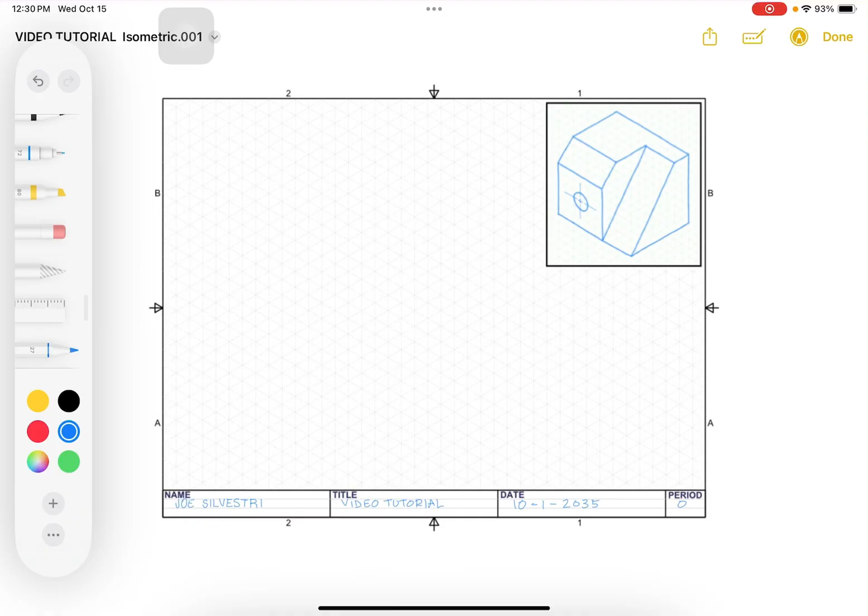And then the next thing you want to do is observe the object. So I'm going to zoom into that. And so this object is fairly complex. It has two angled surfaces. And you can see that here's one of the surfaces, here's the other. And then it also has a hole in it right here where my cursor's at. And so it doesn't tell us how deep the hole is, therefore we assume it goes all the way through.

And so to get started, we're gonna practice what's called subtractive modeling. So we're gonna draw the overall rectangular cube first, and then we'll carve the pieces and parts out of it. Now keep in mind, just like I taught in the lesson, that we draw all isometric lines first, and then we draw non-isometric lines last by connecting the ends of existing lines.

So what is an isometric line? Well, that's a line that is vertical, so watch my cursor, right? A vertical line, or a line at a 30-degree angle going off to the right, or a 30-degree angle going off to the left. All other lines are non-isometric. They don't tell us what angle they're at, because again, we draw them last by connecting the ends of existing lines, therefore the angle doesn't really matter.

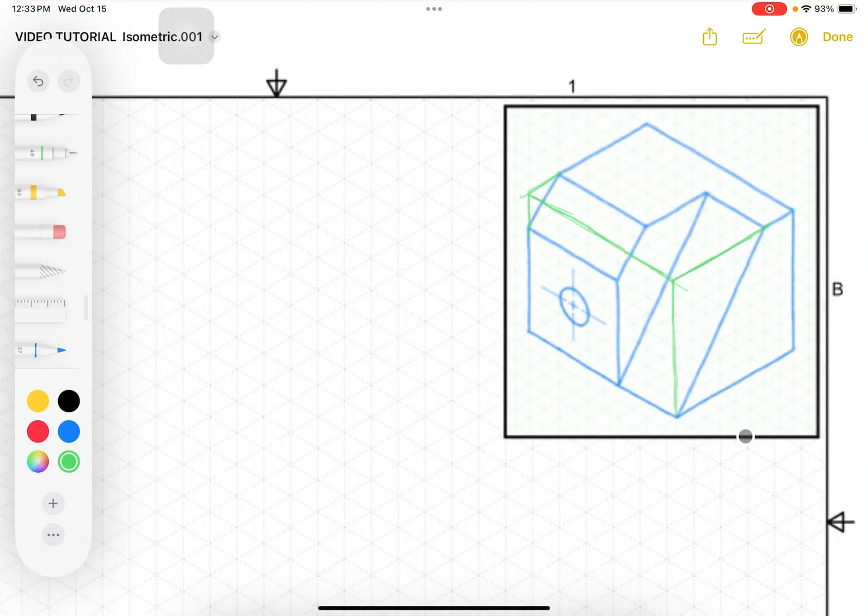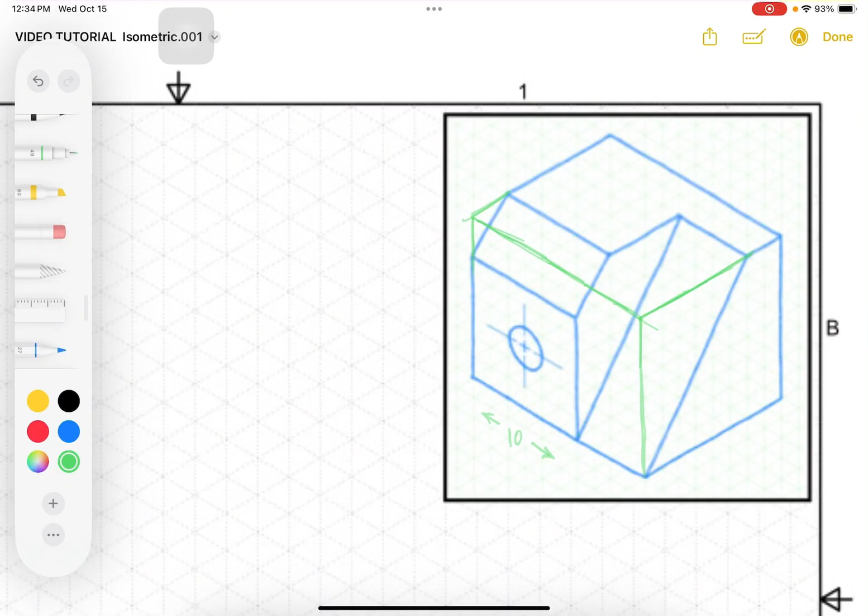So let's go ahead and write down the overall width, depth, and height. We'll write it right on our drawing. And let's see, I'm going to have to zoom in a little bit. Let me count here across the back. So it is 10 blocks wide, and that's in this direction. And I would write this down, and how you write it down, label it, as long as it makes sense to you, that's fine. You'll see in other videos of mine that I do it differently. Again, whatever makes sense to you. They're just there to help you out.

Okay, so that's the overall width, and the overall depth is 8 blocks, and that's in this direction. And then the overall height is 8 blocks as well.

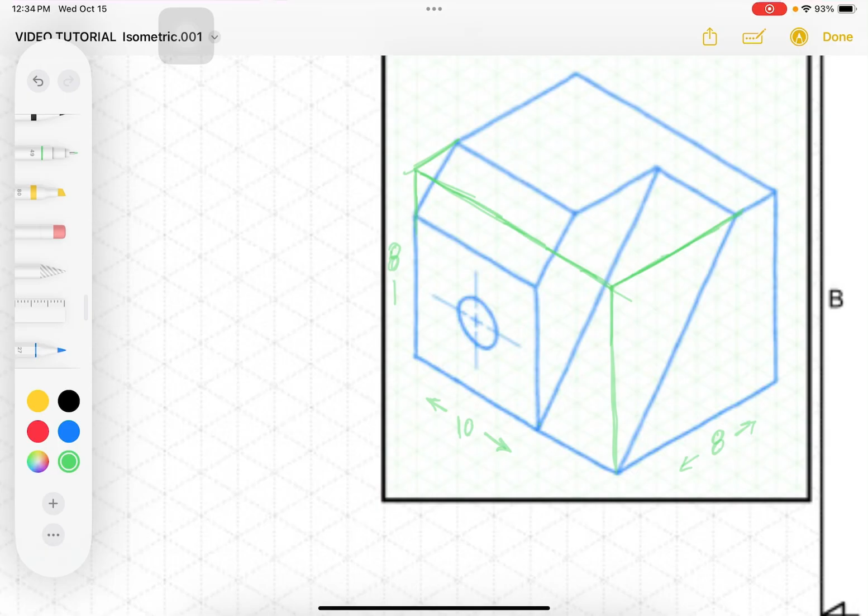Okay, so now I can come out here to my paper, and because I have the isometric in the upper right-hand corner, rather than start in the middle of the paper, I want to cheat down a little bit and a little bit to the left. So somewhere over in this area, I want to plot that point. So I'm just going to go ahead and mark that point. Let's say it's right here, where I put that dot. So I can go 10 in this direction, 8 in this direction, go up 8, and then make my shape.

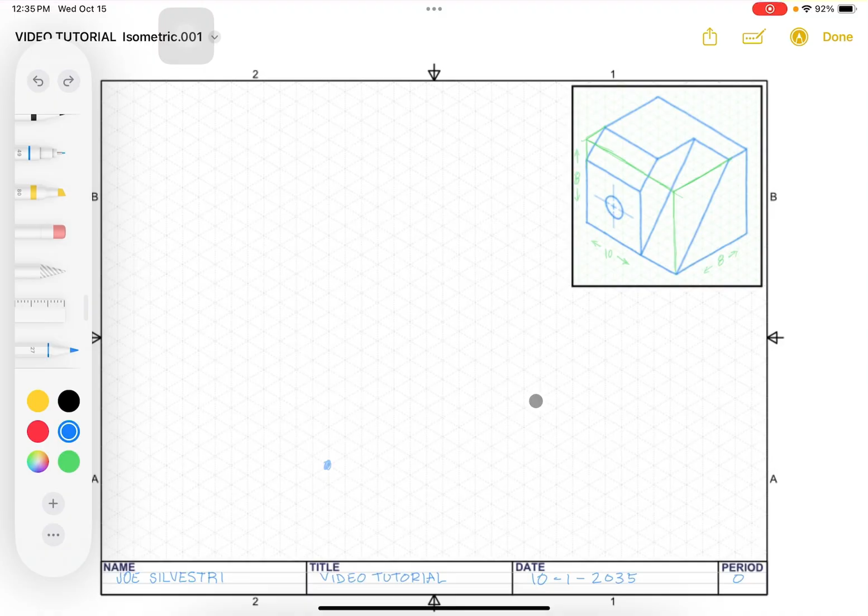So to start with, I'm just going to draw some lines, extra long. Now I want to do this as construction lines, so real nice and light, so that when we get all done, we don't have to erase anything. But yet these lines were here to help us rough in the shape. Okay, so like this. So now I can count along the lines.

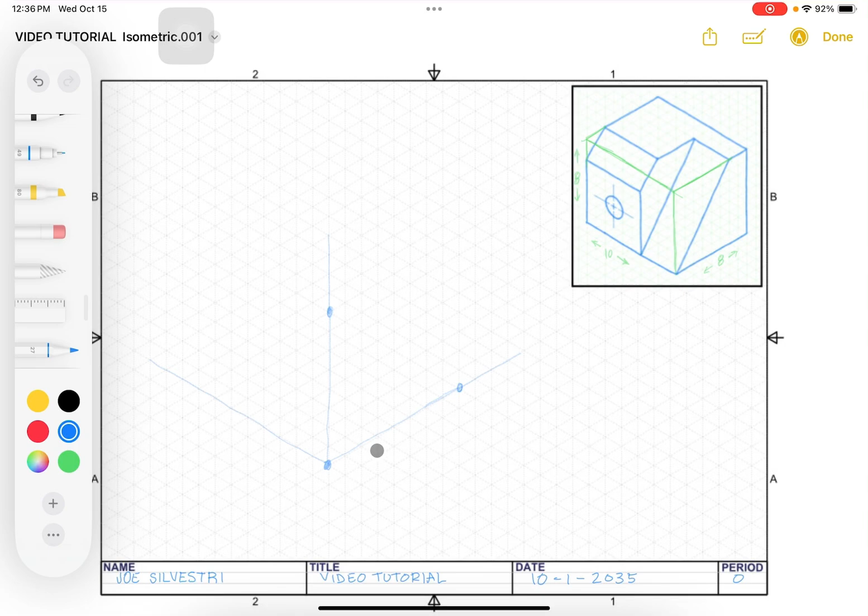And I can plot dots. That's where the line should have ended, right here. And here for the height, right? So right here for the height, and then across the front, that has to be 10. So right here where I put my dots. So now I can just project these up, and I can follow the isometric grid, and I can make my shape. So this might just take a minute.

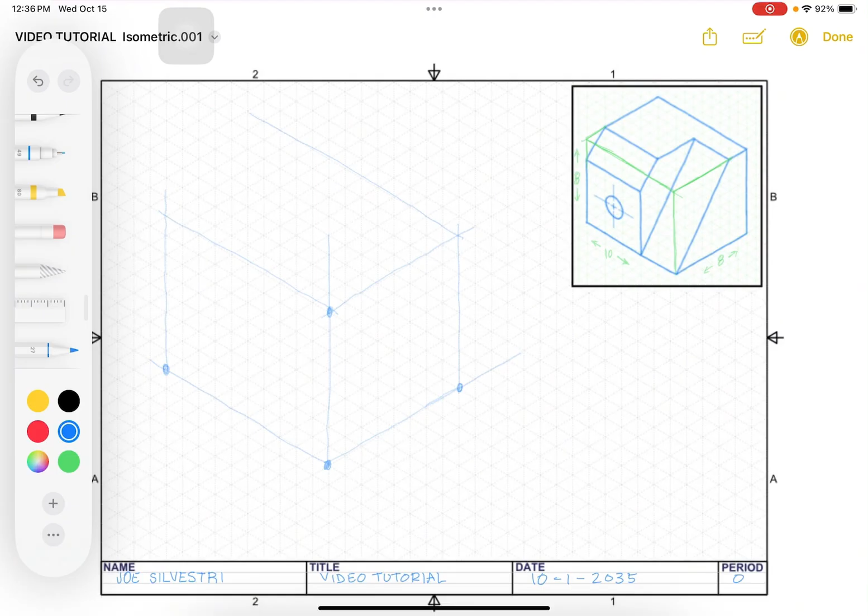Okay, so there we have it. So now I would start in the front view, because the front view is typically the most detailed view. And let's draw the surfaces from the isometric that are touching or are a part of the original rectangular cube. Okay, and so that would be, and let me do this maybe in a different color, just so we can see in the front view, the only existing surface that I haven't carved out and removed is this one here in yellow.

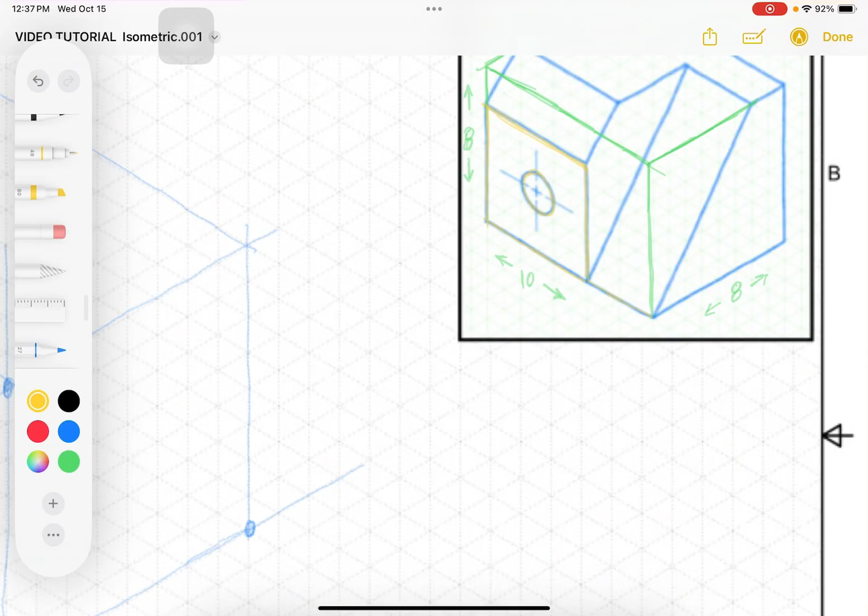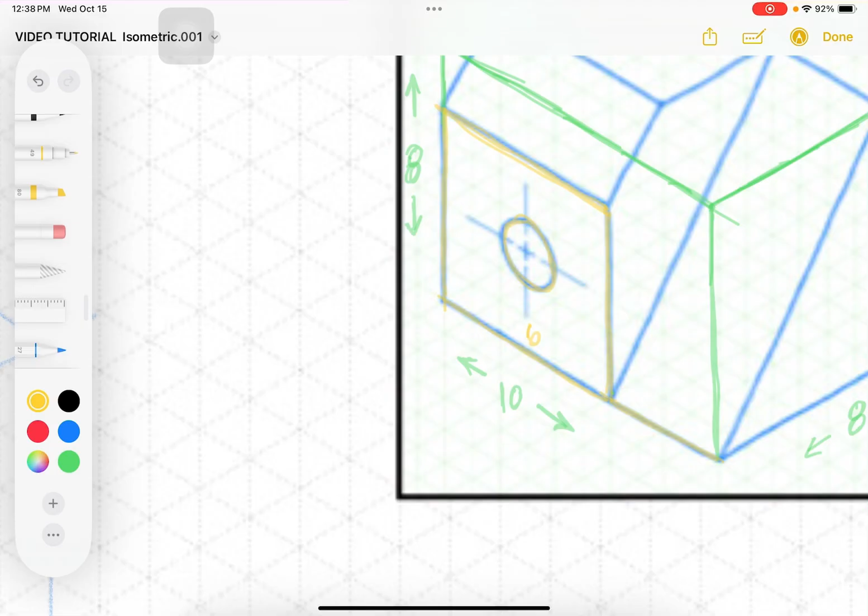So this rectangle, and this ellipse, which is called an isometric circle, and then just this line here. So I need to draw those in the front view. So if you want, you can come back here and you can count the pieces and parts, count the lengths of the lines. So this one here is 6. And it's 6 tall as well. So 6 by 6. So if I come back over here, I count that out.

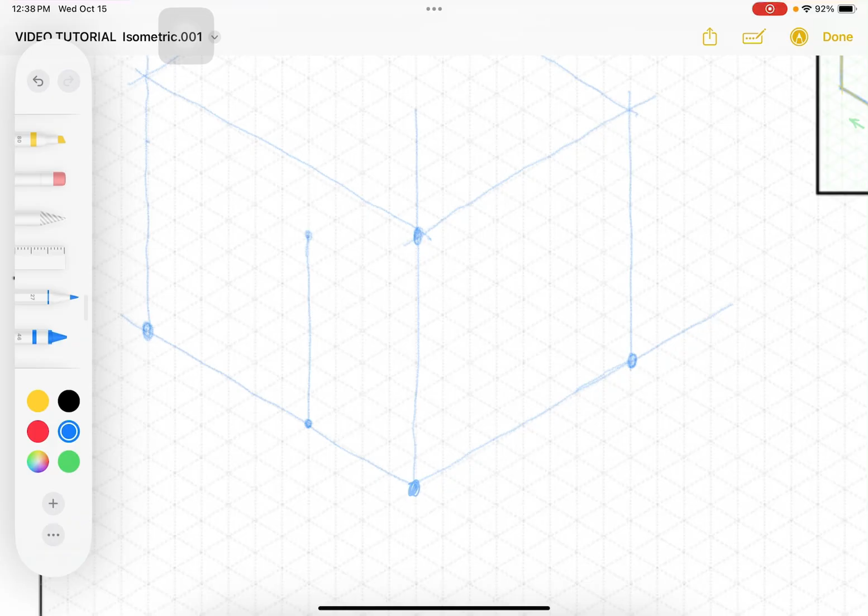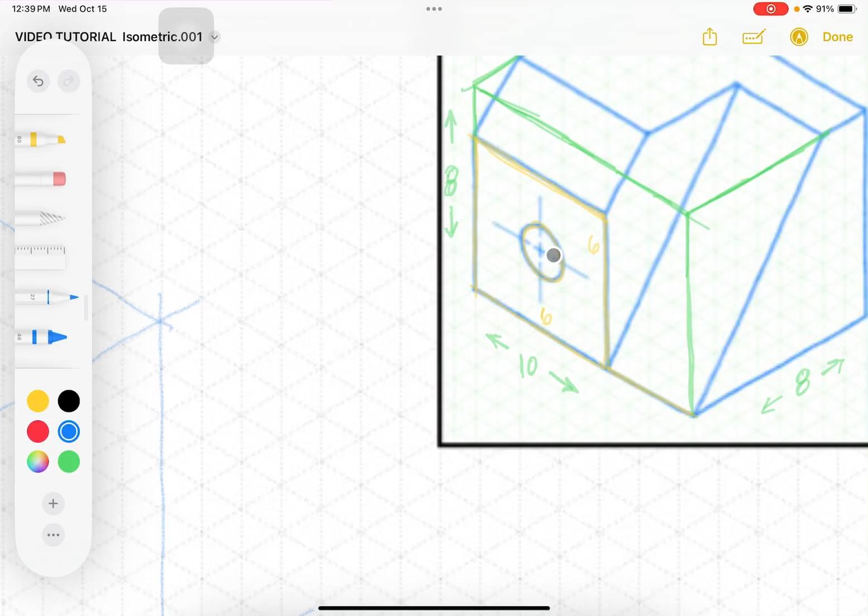And then I can just lightly pencil this in. And so this surface here is this surface here. So again, this is the surface that was a part of the original block. Okay, next thing I want to do is I need to draw my ellipse. So this ellipse is on the front of the object, so therefore it is slanted to the left. If you look at this ellipse, it is slanted to the left, and that has to do with my 30-degree line right here.

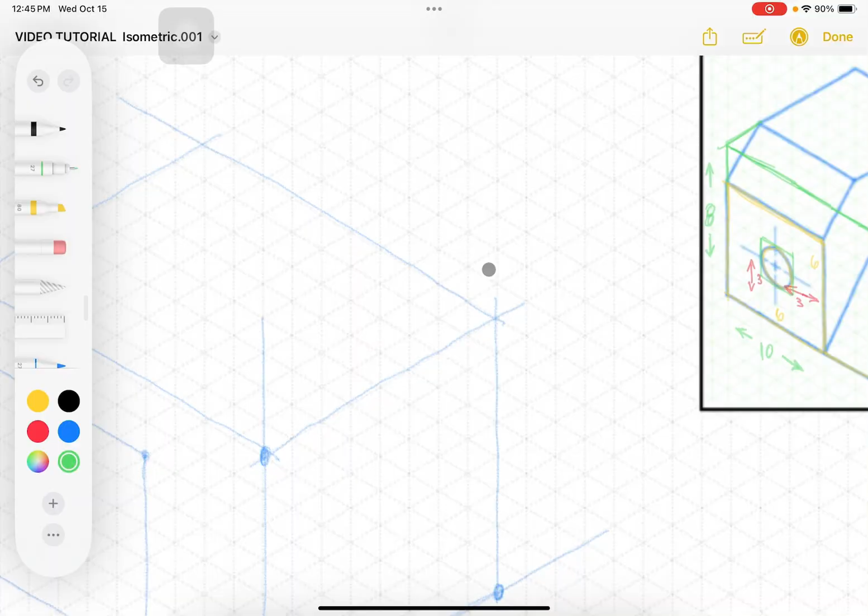Okay, so what I want to do is find out where the center of that ellipse is, because now that I've located the center of the ellipse, I need to locate that over in my own drawing. Okay, and so like we've already predetermined, that is 3 over from the right and 3 up from the bottom. I'm going to then draw this slanted rectangle following the vertical and 30-degree grid lines, and then we'll do a few more things to it that I'll demonstrate over here. So I'm going to come over 3. Okay, so that's going to be right in this area, and then come up 3 right there.

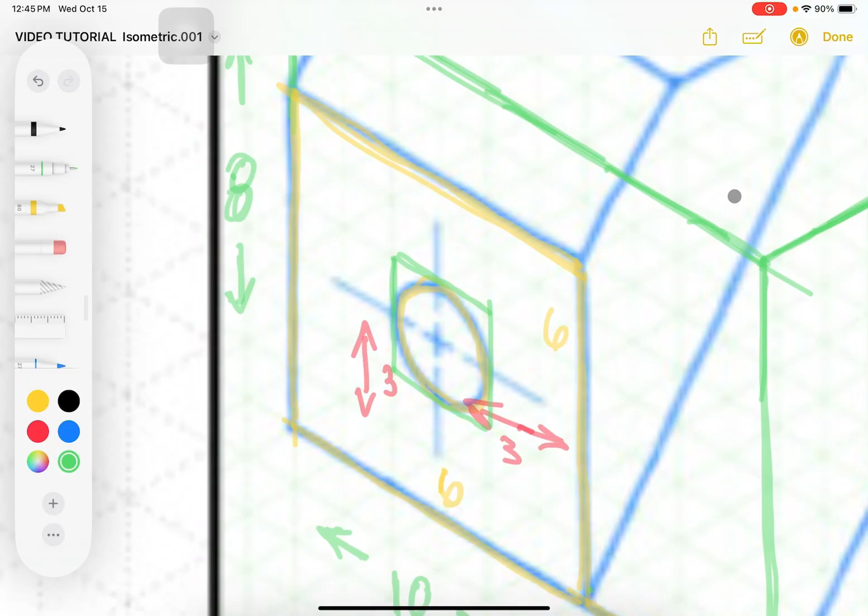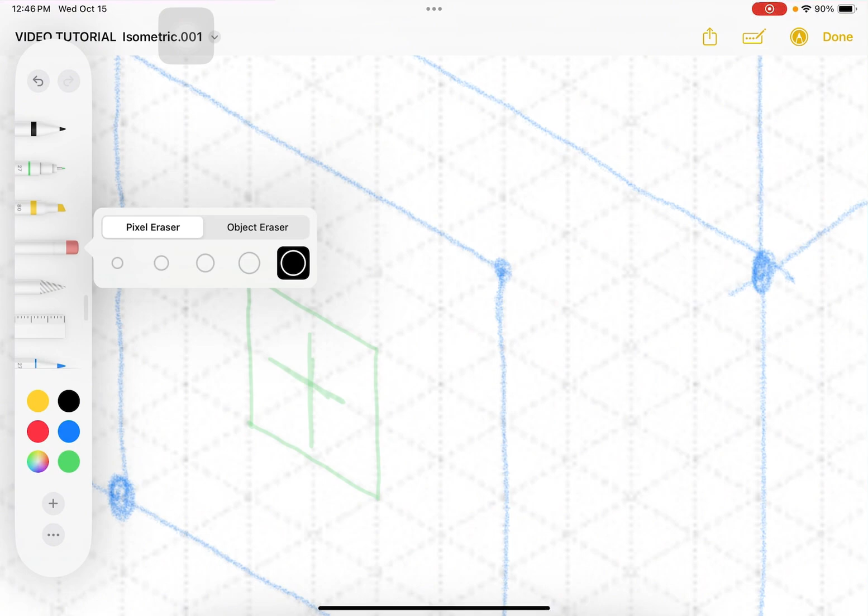Okay, and then I want to draw that slanted rectangle. Well, it is 2 blocks tall and 2 blocks wide. Okay, so from this, I'm going to draw this in right here, like this. Okay, all right. Now, just for visual purposes, I'm going to erase a few things as I go along, so I don't have too many lines on here to confuse you. All right, there's our slanted rectangle. What I want to do next is take each one of the sides and just divide it in half with a little line, like that. Just use your eye, estimate the center.

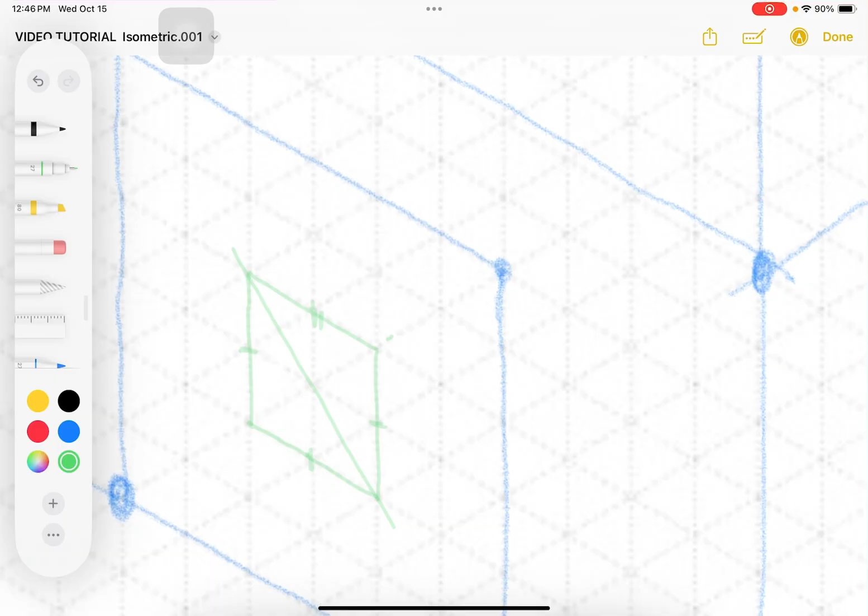Okay, then I want to take and connect the opposite corners. And then from the center, I'm going to go out the distance from the center to the corner. I'm going to come out about 2/3 the length of that line. Just use your eye, so about right here. And then I'm going to take this distance and divide it into thirds and come out about 2/3, so about right here. And do the same here, so it's going to be about right here. And the same in this direction, so about right here.

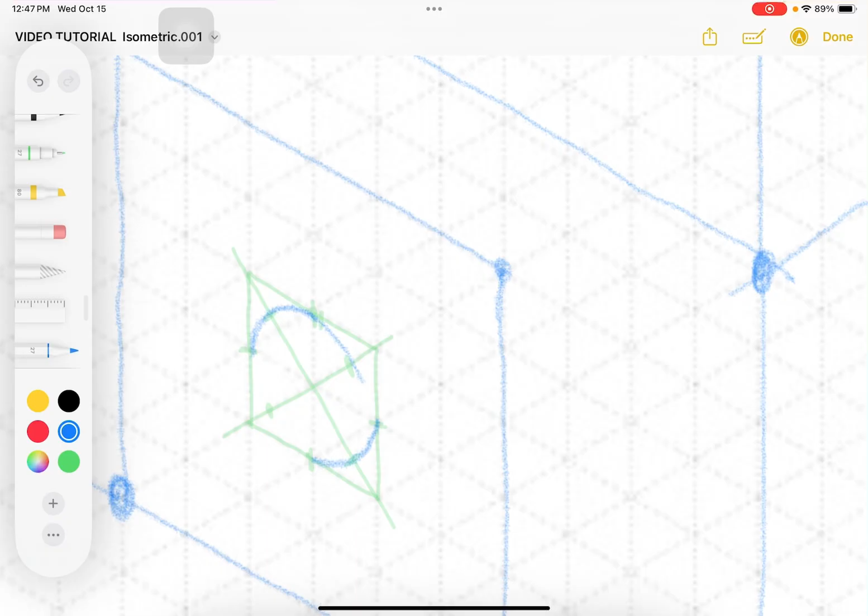Okay, so now what I want to do is make 4 arcs. I'm going to switch back to my blue pencil here. And my first arc is going to be connecting these 3 dots. My second arc, I'm going to do the opposite side here. My third arc, I'm going to connect these 3 dots. And my fourth arc will be connecting these. Okay. And so when you get done, it's not going to be perfect, but it should look pretty good. Okay, and so that is my isometric circle, also known as an ellipse.

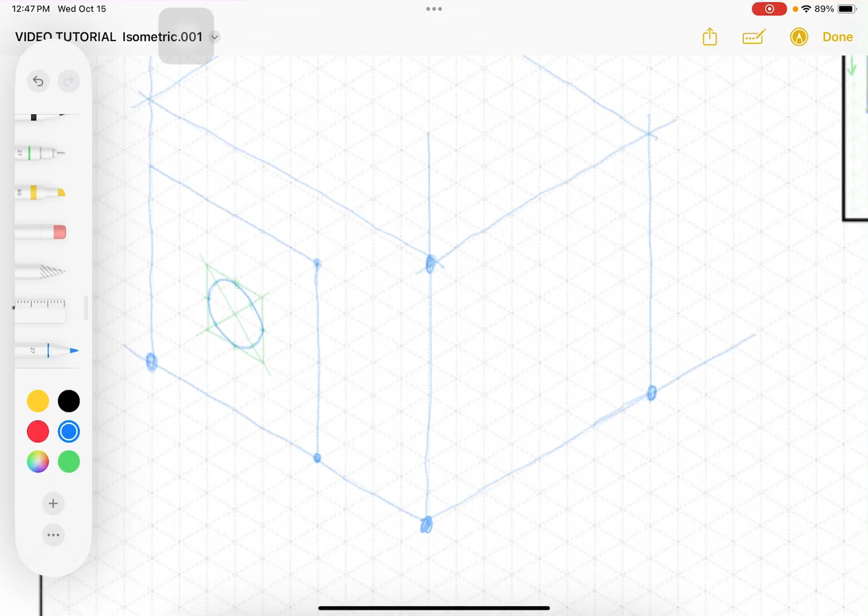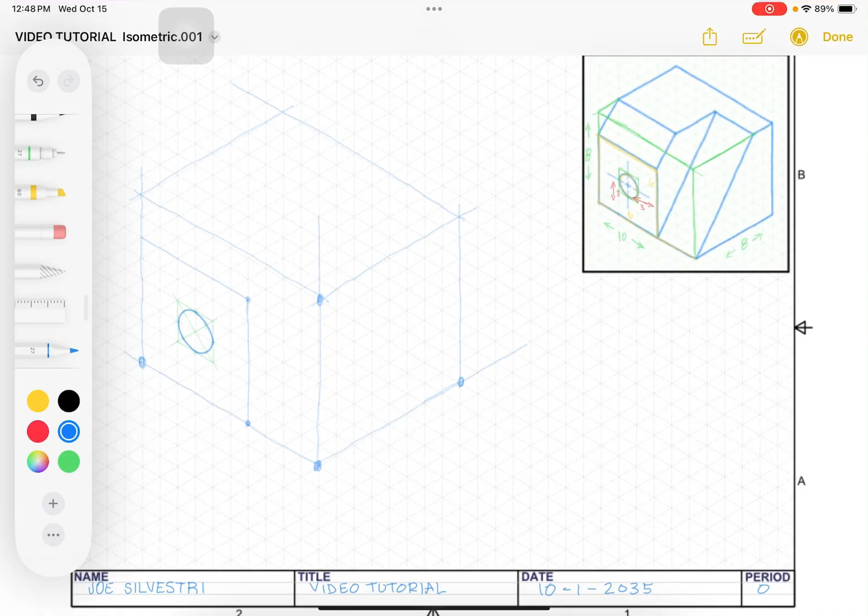So again, now I use green ink. You want to use your 6H pencil and just draw all those lines real lightly. And once you draw the ellipse, if you need to, not necessarily really delineate it quite yet, but just go over it a little bit so it stands out, because you do have a lot of lines right here. But we'll use our 2H pencil later and really do a good job delineating that. Okay, so I've drawn all the pieces and parts in the front view that were a part of the original block. All right, now let's go over to the right side view. So zoom in a little bit.

Let's count out some lengths of lines here to help us out. Well, we've already got how deep it is from front to back. We already know how tall it is. I'll go ahead and write that down again. That's 8. And I determined that over here earlier. And then if we determine the length of that, which is 2, again, you can write these numbers right on your isometric drawing to help you out. Okay, then I'm all set.

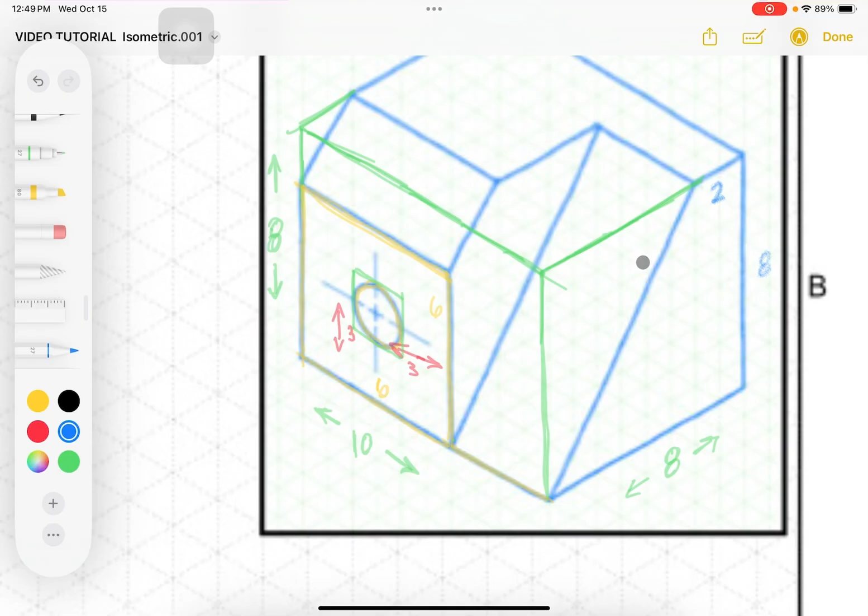How long is this? It doesn't matter. At what angle is it at? Doesn't matter. But this surface was a part of the original block, so we need to draw that. So let's use the measurements that we do have, and let's draw this out. So it's going to be 8 this way, which is already there. 8 this way, which is already there. And then we're going to come forward 2.

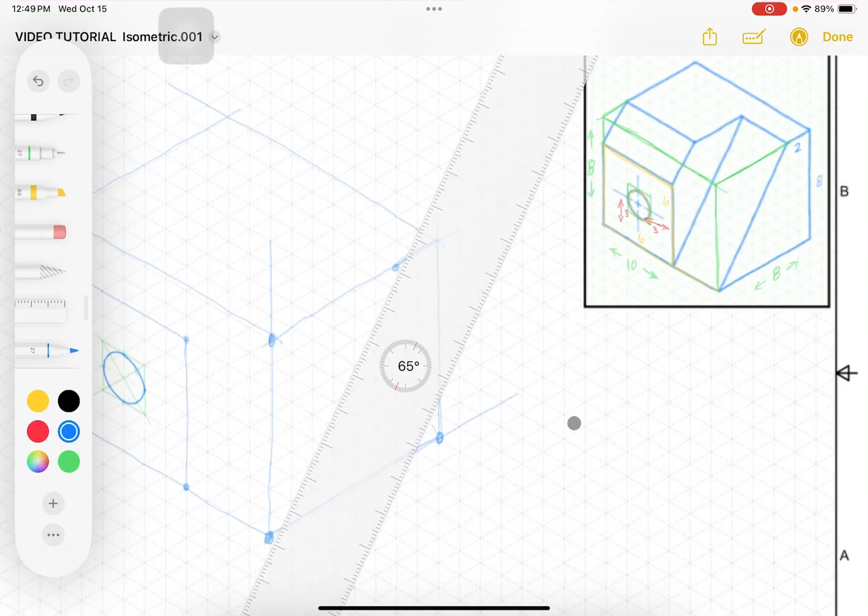Now, how do we draw this line at an angle? Well, we draw it last. It's a non-isometric line. We're going to connect that point to this point. Now, this is where having a straight edge, which I can bring mine out here, will be very useful, like this. So line your straight edge up and then strike your line. Okay, so again, we're still just working on surfaces that existed as part of the original block. Okay, the right side view is done for now.

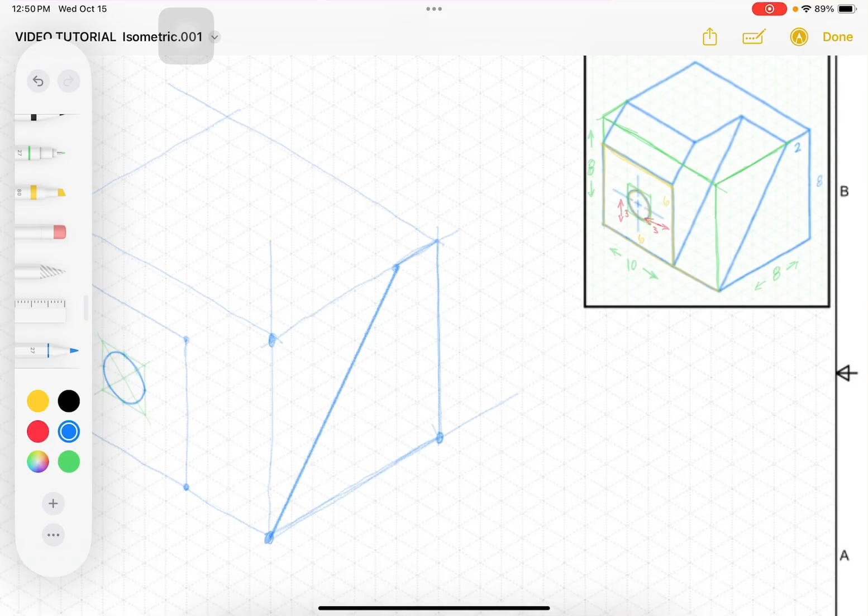Let's go to the top view. Well, what surface was originally part of the block? Well, that would be this surface here. So once again, let's just count out the lengths of the lines. We can write it down. This here is going to be 10, and I know that from down here, drawing the front view. So this is 10. We already know that's 2. This here is 1, 2, 3, 4. And then, let's see, this overall should be 6. Yep, that's 6. Okay.

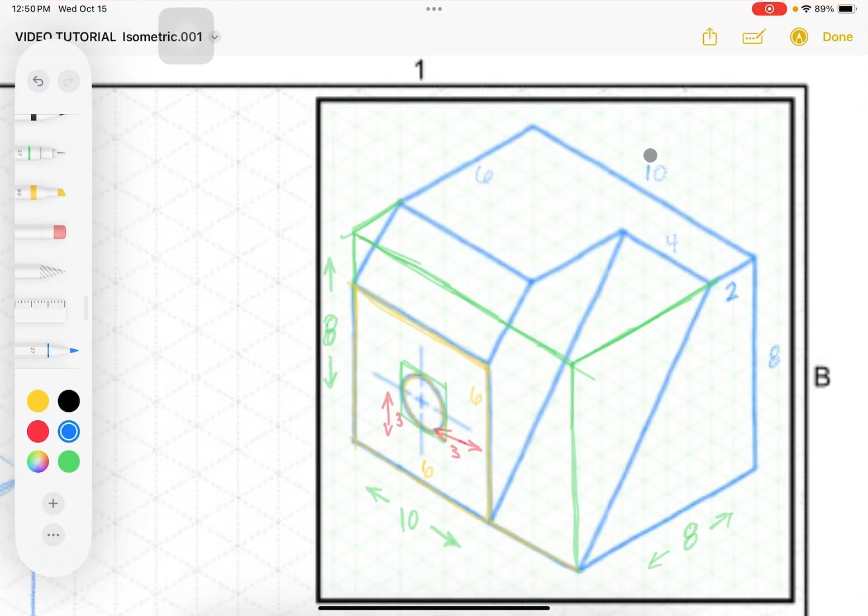Notice that I did not count how long this was or how long this was, and I'll show you why here in just a minute. So let's draw what we do know. So we already have the 2. That's here. Right? That's the 2. We already have the 10. I'm just going to go ahead and slightly delineate that. Again, you use your straight edge and your 2H pencil later. And then I want 6 blocks of this line. That's going to be right here.

Okay, and then what I want to do is bring that over a little bit extra long. And if I look over here in this drawing, where this line comes straight up and then hits my green line and bends back, that's where this is at. So I don't need to count it out. So I can just bring this up till it touches this line and then follow that grid line back. And so it should end right there. Okay, and then I can bring this line straight over extra long, bring this line back till it touches, and that makes these 2 lines.

And again, I'm just going to slightly darken these in so you can see them. Okay, and so now I've drawn the surface in the top that was touching and a part of the original cube. Okay, let me go back to the front view and just delineate that just a little bit so we can see those.

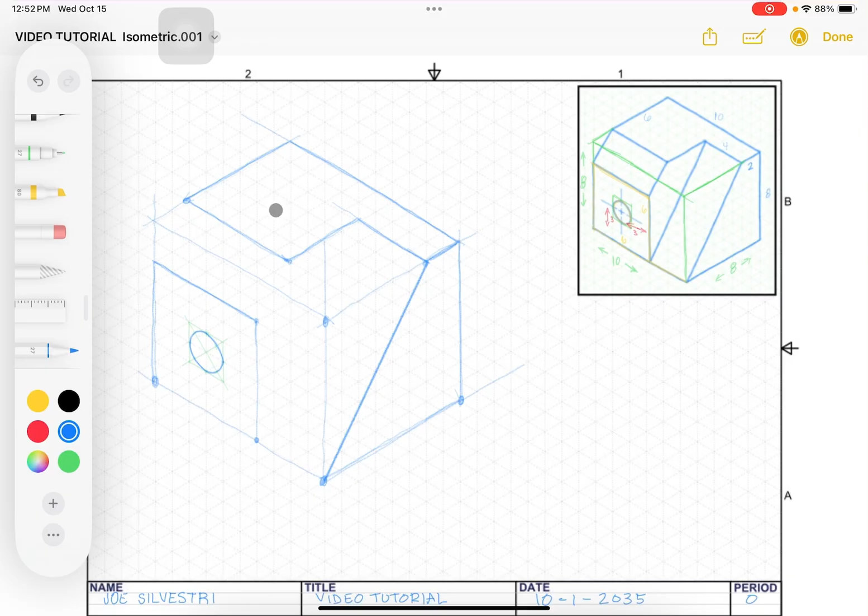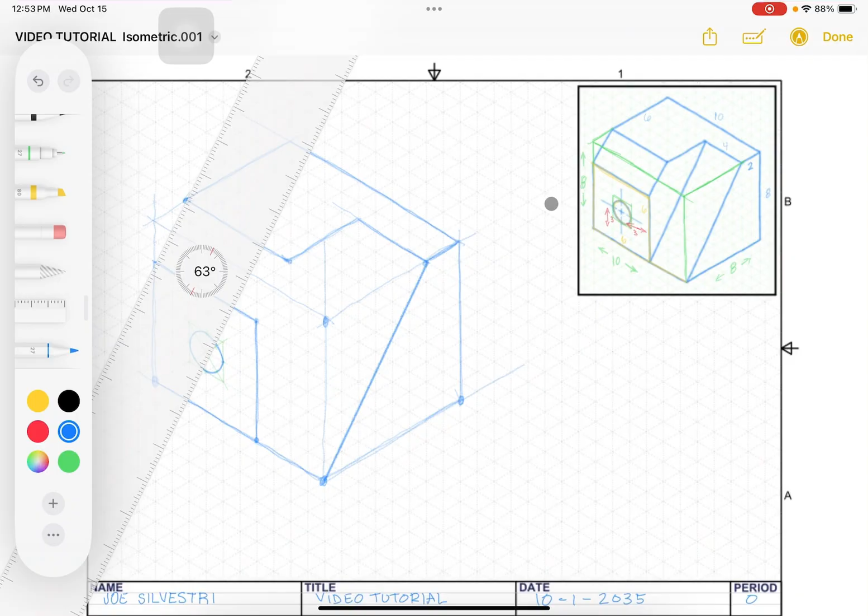Okay. So now we should just be able to finish this without doing any counting, any measuring, or anything like that. Just observe this object and find the lines that we haven't drawn and see where they connect, and then just connect them over here. So this line connects with that corner to this corner. So yes, it would definitely be useful to use your straight edge. So that goes there. This connects here. And this connects here like this. And the drawing is all done.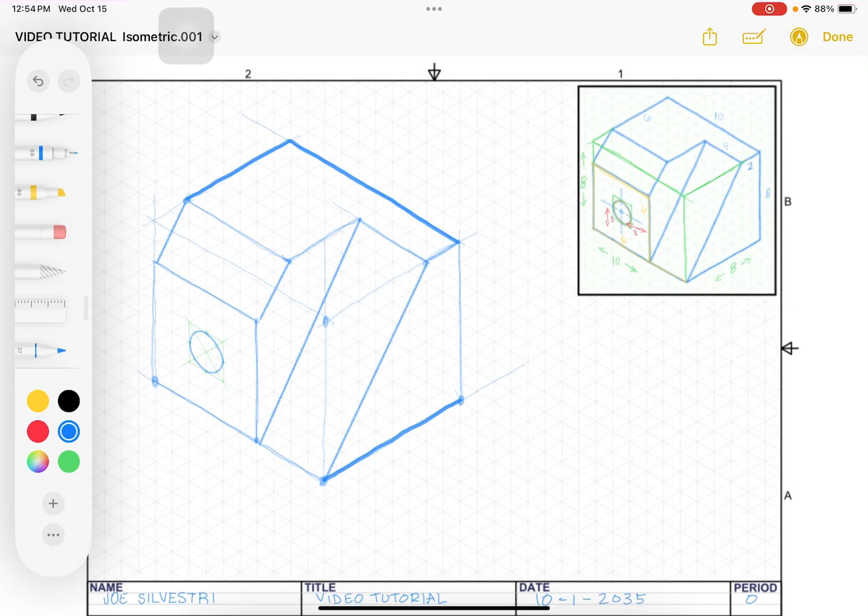The last thing I need to do is delineate my lines. So obviously you're going to use the straight edge. I'm going to do it freehand because it's not difficult to use the ruler in Apple Notes, but it's also not convenient. So I'm just going to do this freehand just to speed this process up. And as with everything, practice makes perfect. If you want to get good at being able to draw good straight lines without a straight edge, you just have to practice. So my lines are fairly straight.

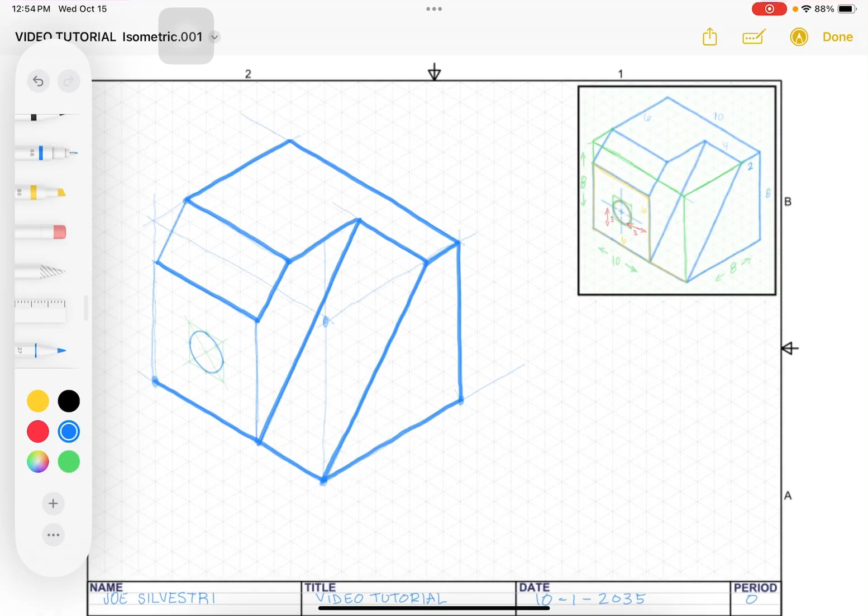Of course, take your time. This is where you're truly delineating your lines. With your HB pencil, it should be dull, so you make nice thick lines. Okay. And we'll zoom in and we'll do the ellipse as well. And that is the drawing. It is complete. And that's how you create an isometric drawing through subtractive modeling that happens to have a hole in it and a couple of surfaces at an angle.